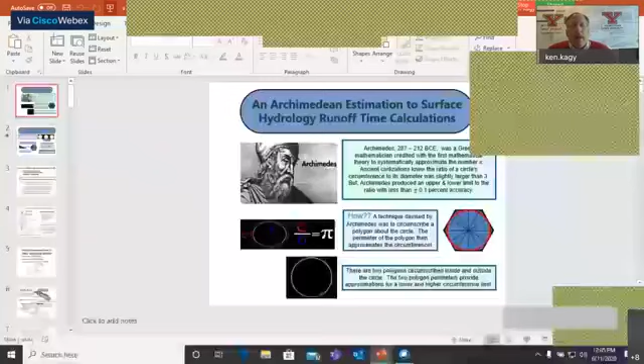All right, so let me pull this presentation up. I've done this presentation for the last 5 or 6 years, and this is the first time I brought in this Archimedes idea, because I was studying him the other day, and I realized that some of the things he did were pretty close to what I was trying to do with this time of concentration. So I just brought it in at the beginning, but this is certainly not how I initially started this research or idea. I just kind of fell into it after reviewing thousands of hydrological reports over the years. It just kind of came to me.

But anyway, just a quick history here, a different approach to what I'm going to be talking about. Archimedes was a mathematician, and he was credited for systematically approximating pi. The way he did that, he developed a technique. Pi was well known back then, like 3,000 years even before Archimedes. They knew there was a ratio between the diameter of a circle and the circumference of a circle, and they knew it was around 3, but they didn't know exactly what that number was.

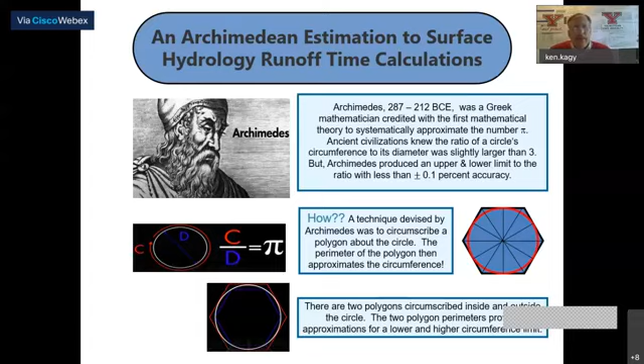So he devised a technique. He circumscribed a polygon about the circle and inside the circle, and then was able to use the Pythagorean theorem to estimate the edges of those triangles. He drew triangles from those polygons, and obviously the more polygons you have, the more accurate that estimate is going to be of the circumference of that circle. So I think he started out with a six-sided polygon, divided into 6 or 12 triangles, and then kept increasing it until he felt he had enough triangles to really estimate the arc of the circle a little bit better.

Back in about 250 BC, he had a 96-sided polygon, and he estimated, based on the outside polygon and the inside part of that polygon, that pi was somewhere between 22/7 and 223/71. That was within 0.1% accuracy, which is amazing considering he didn't have a calculator. In fact, they didn't even use decimal points back then - all they had was fractions.

He did some mathematically ingenious things. He's also known for the Archimedes principle, where the king was concerned that his crown wasn't completely gold. Archimedes was able to submerge the crown in water and estimate the density of the jewels and metal in that crown. It was amazing. He was probably the original master of rational thinking back then.

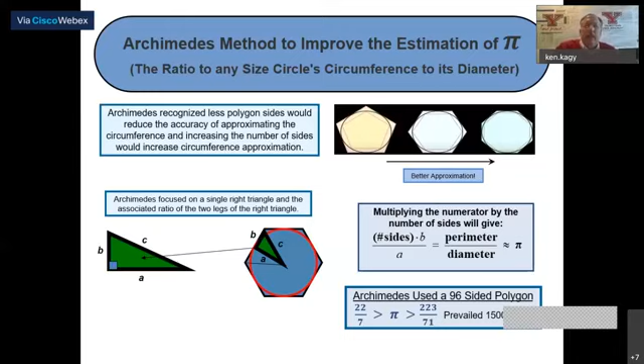But anyway, let's talk about how this would really apply to hydrology. I'm going to start from some of the basics. I know the audience out there really understands these fundamentals, but sometimes I have people who don't understand the basics of hydrology.

Factors affecting stormwater runoff include surface conditions, soil type, watershed size, length of runoff, basin slope, and rainfall depth. Those are all different factors that affect this.

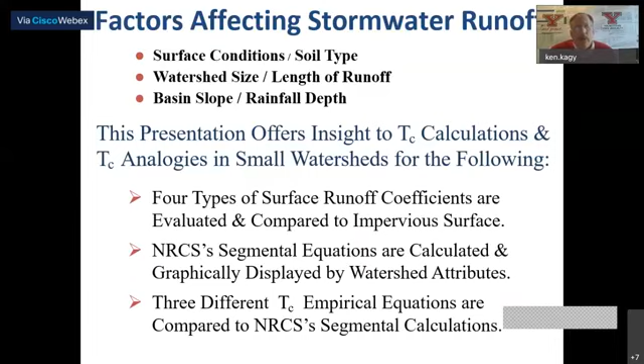In this study we'll look at four different types of surface runoff coefficients that are commonly used, evaluate and compare them, and use NRCS's segmental equations, sometimes called velocity equations, displayed graphically. Then we'll look at three different time of concentration empirical equations and compare all four equations in graphs.

So this is the basic definition of time of concentration. Basically, time of concentration is the time required for the most remote hydraulic distance in the watershed to reach the point of the basin outlet. That's a fundamental part of hydrology theory, and it's important for estimating peak flows because time of concentration is necessary in all the calculations used in hydrology.

I've talked to other professors about this subject, and they say it's probably the least understood parameter of hydrology and where most errors occur. I see that in my thousands of reviews of hydrology reports. There's just lots of errors in this particular area.

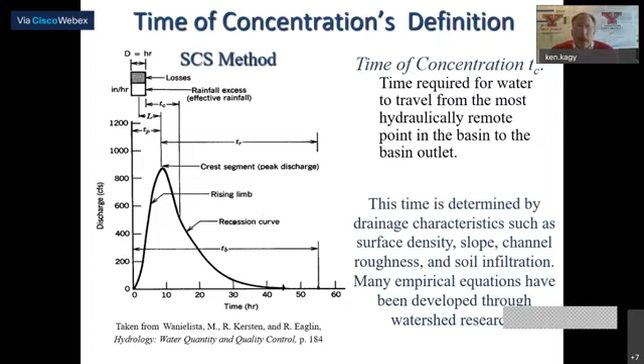So the first one we're going to talk about is velocity equations and NRCS segmental equations. You've got sheet flow, shallow flow, and open channel flow on a watershed basin.

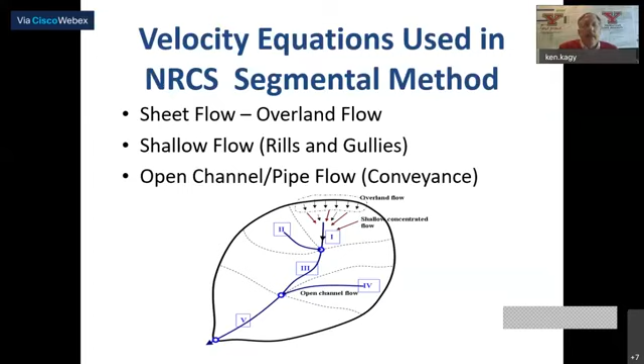The first one is sheet flow, which is estimated by the Manning's kinematic wave equation. Here's the equation itself. Most of you are familiar with it, and it's a very common equation used for stormwater runoff in a lot of areas.

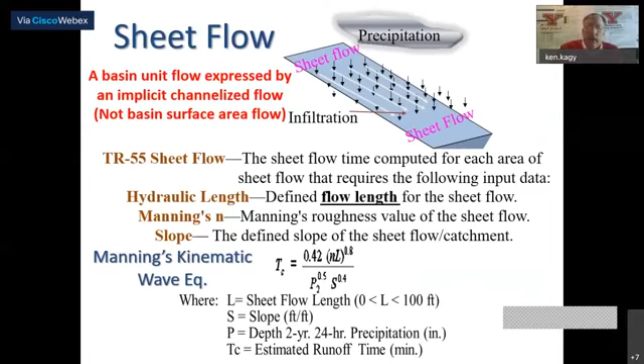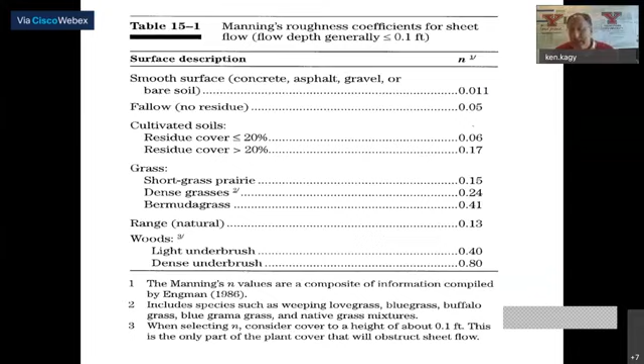And I've seen in practice that people don't differentiate between those coefficients sometimes. They're using channel coefficients in sheet flow and in channel flow, and it does create a bit of a problem.

Over the years, in 1982, Kibler and Aaron indicated the maximum flow length is less than 100 feet for sheet flow.

Dr. McCuen, who I've spoken to on this particular project, came up with equation 15-8, which is in the National Engineering Handbook. It gives you a rough estimate for the length of flow that you would use for sheet flow. Not many people practicing or doing hydrology reports subscribe to this.

It does have its issues, especially on pervious surfaces. It's not real accurate on pervious surfaces, but it does a pretty good job there. On impervious surfaces, it's a little bit more accurate.

So what I did was take the Manning's low value for sheet flow and the high value, came up with an average, and knew what that related to percentage-wise for an impervious surface and a very pervious surface. So I took the extremes and plotted that out graphically just to get an idea.

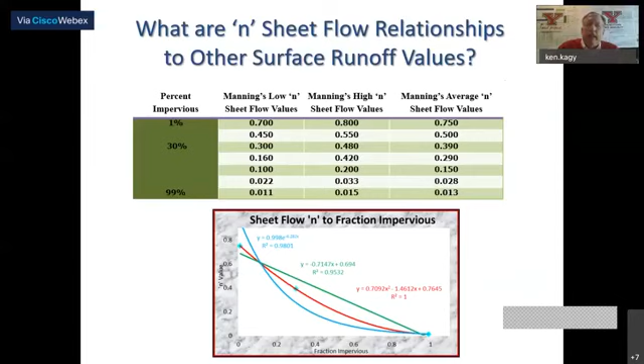What I'm trying to do is get a reasonable distribution in your n values. They may or may not be evenly distributed, but I wanted to get an idea of where these n values fall between the extremes, between a 1% impervious surface and a 99% impervious surface. So I used exponential, linear, and polynomial equations, and averaged those out.

And so I just re-plotted that out and got a fairly reasonable distribution. Next, we'll go into shallow flow.

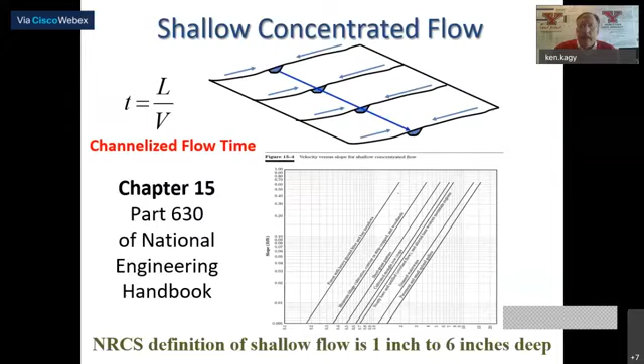Concentrated flow - the engineering handbook has a chart in there for different types of surface runoff. NRCS considers shallow flow to be from 1 inch to 6 inches deep. That's what they consider shallow flow. And so they have created some of these velocity equations based on that depth. This is from the engineering handbook.

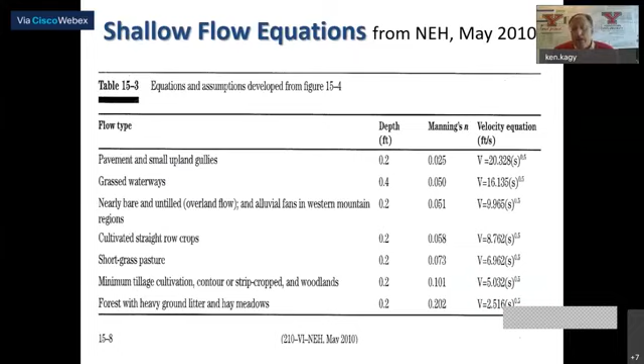And so I just took - you can recalculate these velocity equations. It's just taking Manning's n value and the depth and coming up with a equation from Manning's equation. And so I established a whole set of velocity equations based on my distribution of n values that I just recently calculated, and a flow depth of a quarter of a foot, a little bit deeper, but not much.

Open channel flow, this is Manning's equation, and that's usually what's done. But what I've found in practice is that most people don't really know their channels that well in the basin. So they're just taking an average shape and size of the channel flow and guessing that that's what their channel is going to be. But obviously the channel is going to change as it runs through the basin. It's going to change in size, in width, and its characteristics as it goes through.

But we're looking at some smaller watersheds here, and in these smaller watersheds you can do the same thing you do for shallow flow, as long as the flow depth is small and wide in the channel. So we were going to take that assumption. Then you can do the same thing - you can create velocity equations.

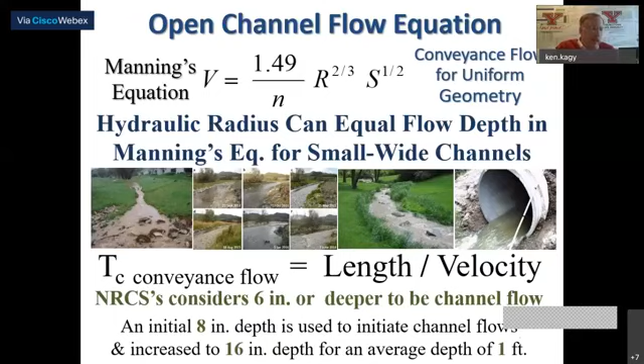NRCS considers anything over 6 inches or deeper to be channel flow. I did an initial 8 inches and increased it up to the maximum of my watershed size, up to 16 inches of depth, so I had an average about 1 foot depth. And if it's an 18-inch pipe inside a watershed basin, that's a pretty reasonable assumption.

These are Manning's n values for channel coefficients here. Most of you are familiar with them. And so then I went through and calculated out these velocity equations based on Manning's n value and initial flow of 0.67 foot, and then of course 1.35 feet of depth.

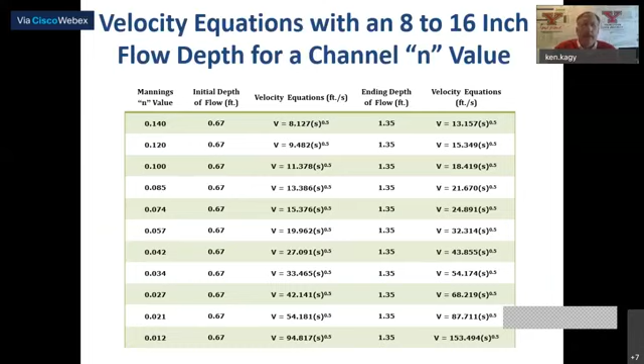So in calculating hydraulic time calculations in the velocity method, you take all 3 of these - sheet flow, shallow flow, and channel flow - and you add them all together. You sum them all up, and that's what you use for your time of concentration. And I can tell you 95% of the reports I see use this method right here for calculating their time of concentration.

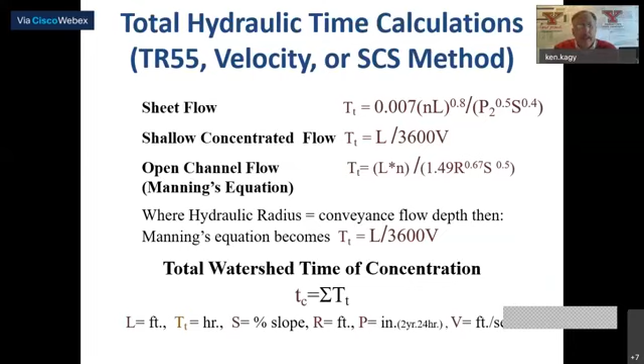And it has its issues. Certainly the big issue it really has is the sheet flow. And there's been a lot of debate on sheet flow. We can discuss that later on, but that's one of the biggest issues you have.

So I'm taking McCuen's equation here, and I'm limiting my sheet flow basically 90 to 110 feet for my more impervious surface, and then I'm dropping it down 10%, just as my increments of the surface conditions also drop down by at least 10%. Remember, I distributed out even 10% - the 1, the 10, the 20% impervious.

And same with the shallow flow, so I did 400 to 500 feet, which is what the National Engineering Handbook recommends for length - about 3 to 4 times the sheet flow. And in actuality, if you want to get an accurate measurement, you should actually go out and visit your drainage basin and take some of these measurements. But I assure you, nobody really does when they do these calculations.

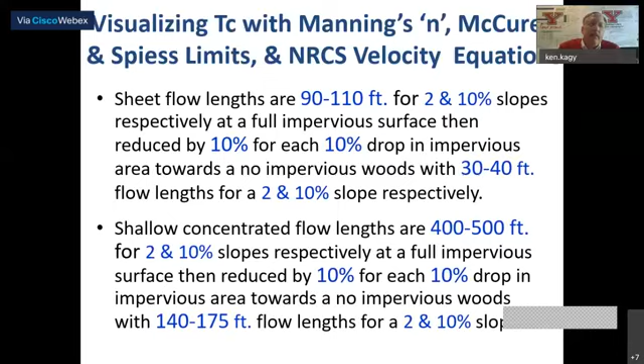So now we're going to try to visualize this. The remaining flow path was considered channel flow, the deeper flow, and the equations consider flow, the path geometry, slope, and surface conditions, all considered homogeneous.

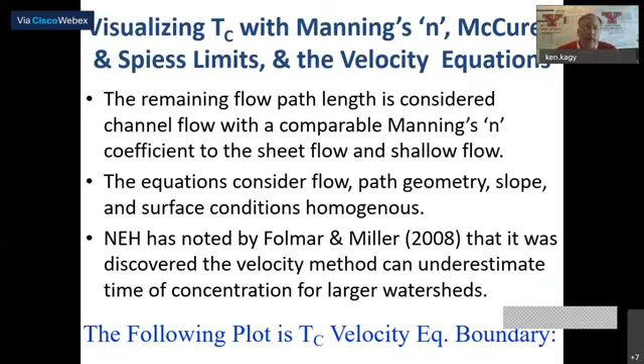So what this looks like when we plot this out, if you take the extremes here, we have a 1% slope at 1% impervious, which is a very pervious surface. And at the bottom side, I took a 12% slope at 99% impervious. So now we have some boundary conditions here with time of concentration, because we know that probably the majority of our time of concentration is going to occur between these 2 boundary conditions. There's going to be unique situations out there where this may not happen, but 95% of your hydrology studies are going to happen within these boundaries.

So what we want to know, or what we want to find out, is what's in between here. What's in between those 2 lines, and how do we fill in? How do we find out the information between those 2 lines?

So these are some of the basic assumptions I used. High impervious surface basins are defined by the lower graph, and the pervious surfaces are defined by the upper graph. This is where most of your time of concentration occurs.

Following were interpolations for relationships of percent impervious using the CN value, the C value, and N values. I then calculated those out using the velocity equations based on my distribution of those values.

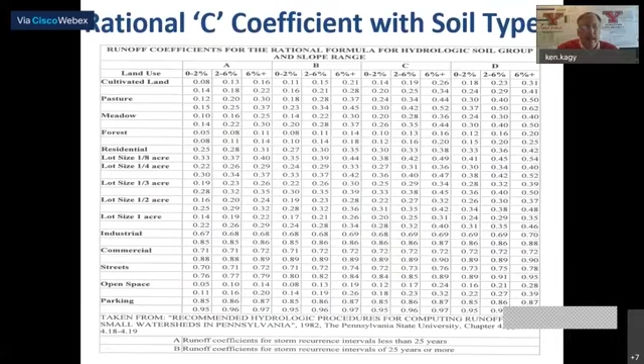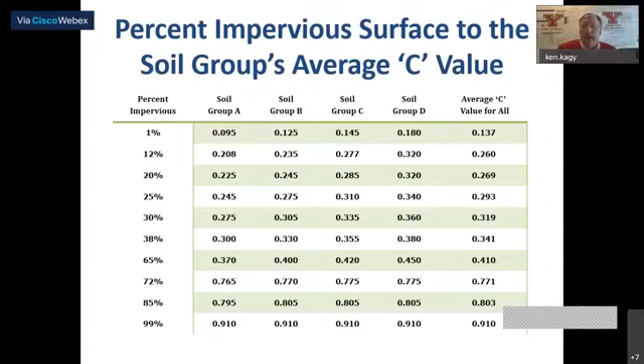They incorporate slopes into C values, and these are the common percent impervious surfaces based on the same description you saw in the CN values. So we can relate those C values based on this table. This one happens to be from Pennsylvania State University, generated for that area. I then related the percent imperviousness with those soil groups for C values and took an average for all of them.

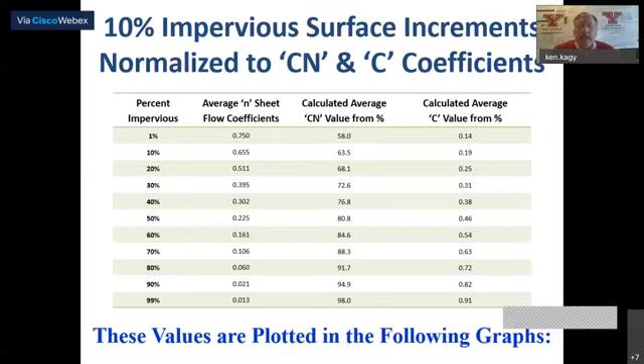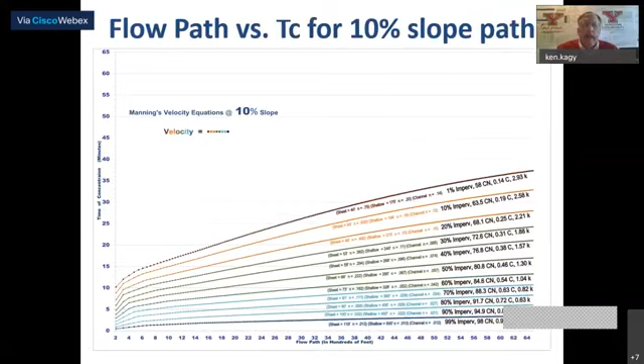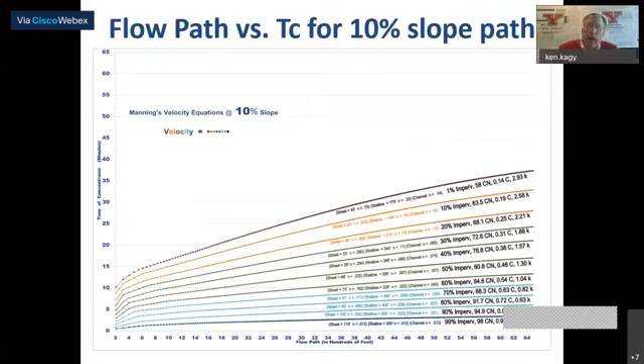Here's what 10% looks like, and now you can see they really start to compress. But we have something to compare to, with N values, CN values, and C values — they're all related now, and tied back to impervious surface.

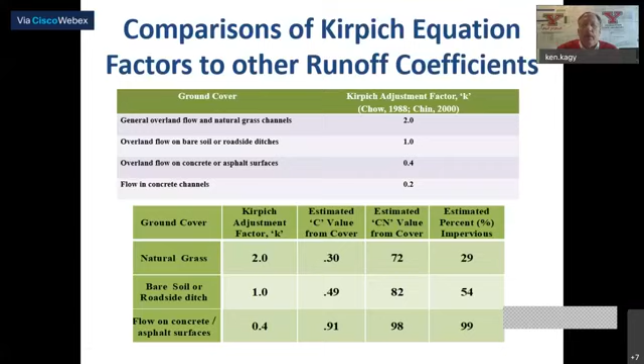I plotted those out and I'm calling it the K value. What we don't have is a K value for the Kirpich equation on the wooded end, so we'll have to extrapolate a little, which is sometimes dangerous, but we didn't have to extrapolate too far, so hopefully it's not too big a risk. Now I compare — I calculated this out just like I did with the N values.

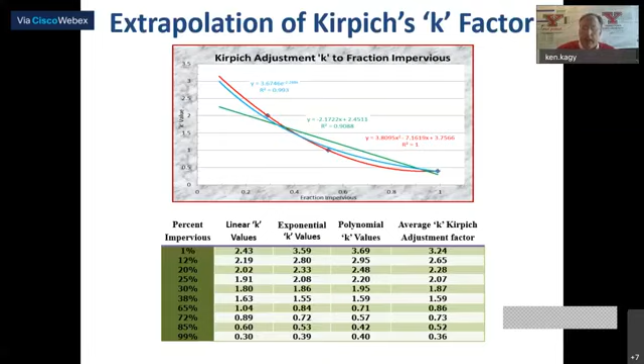As you can see, I did the linear, exponential, and polynomial equations, and I came up with an average for each type of percent, using just the initial 3 plots. Then when I redid that average, recalculated it and replotted it, I came up with an estimate for 1%, which is about a K factor of about 3.

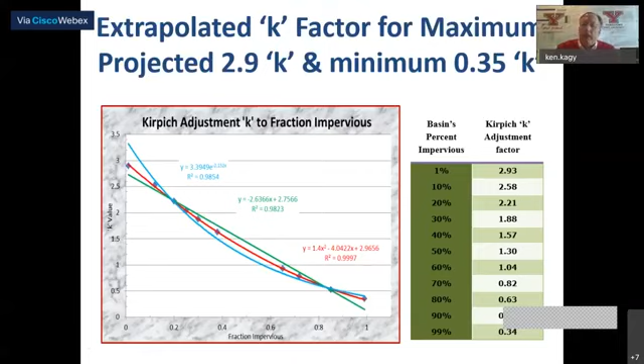That's the area that we don't really have any research on, so we just kind of projected it out there from extrapolation. Now I've got a table that can relate impervious surface to CN values, to C values, to Kirpich K value, and the N sheet flow coefficients. Here's this table.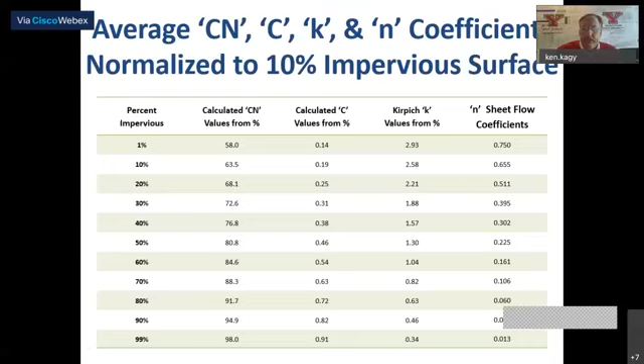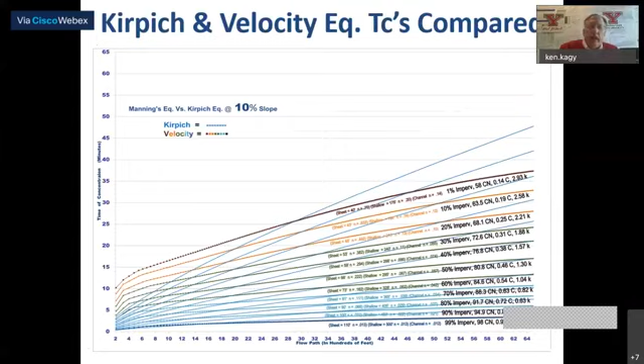Here's what 5% looks like, and here's what 10% looks like. They all start to compress, which makes sense. But you can see Kirpich is much lower down at the bottom end, or the shorter end of the flow path. That's really because of the sheet flow calculation that's in the velocity equations.

NRCS lag equations are a very popular equation. I've seen that if they're not using the velocity equations, most are using NRCS lag equations. It was developed by Mockus in 1961, for areas less than 2,000 acres. That's a little bigger basin than what I was looking at, but it still fit the description. It's very popular, it has a CN value in there, and it's basically an equation formed on basin surface data or surface conditions.

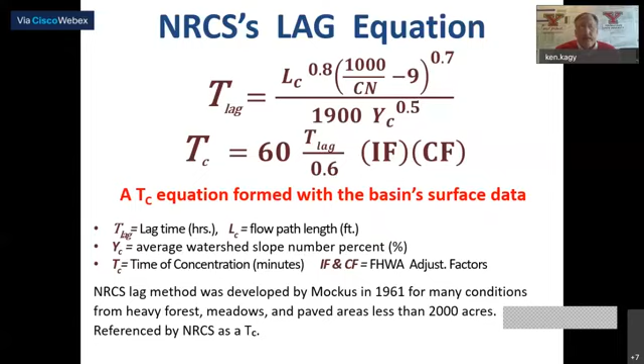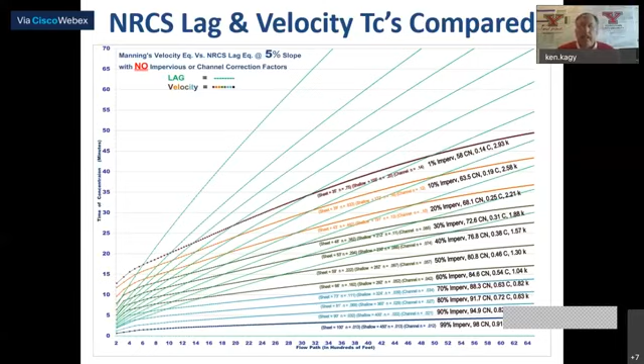When you plot these out and compare them to the velocity equations, you can see they're very high in time of concentration. That's what I see a lot of people using in hydrology reports, ending up with very high time of concentration. It almost misses here - this is for 5%, it almost misses all of the velocity equations, starting about halfway down on the velocity equations.

But Federal Highway Administration, in HEC 19, developed this adjustment factor IF, and applied it because they felt that, since they're not always working with farmland, which is where NRCS/Mockus developed his time of concentration equation on agricultural type land, they added some impervious factor, this IF value, and a main channel or man-made channel factor. If you take these factors, I already had a relationship for CN values to impervious factor from the table I just created.

The main channel factor is a little bit of a speculation, but the fact is, above a CN of 80 or better, or especially 85, there's going to be a lot of man-made channels in that type of development or surface condition, because there's a lot of impervious surface.

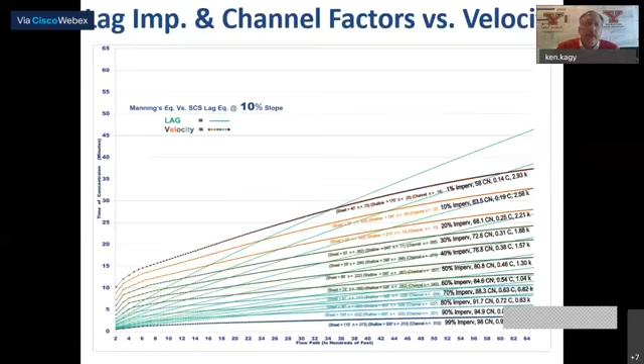Another equation I took a look at was the FAA equation. This equation is sometimes, or quite often, used in urban conditions. It was based on surface data or surface condition. There was no channelization consideration in this equation, but it was done on airports, developed by the Army Corps for FAA.

I really like this equation because when we plot it out compared to the velocity equations, it has almost identical shape to the curve of the velocity equations, but there's no channelization factor. If anybody has a channelization factor for this equation, I'd be interested in talking to you, because it almost fits these velocity equations. I've found that without that 1.8 factor in there, it drops down real close to these velocity equations. In fact, Texas had a modified FAA time of concentration equation.

I think they use 0.7 something as a factor rather than the 1.8, and it almost puts these a lot closer to being in line. But I wanted to just show this as a comparison, because this is what happens when you don't have channelization in your time of concentration calculations.

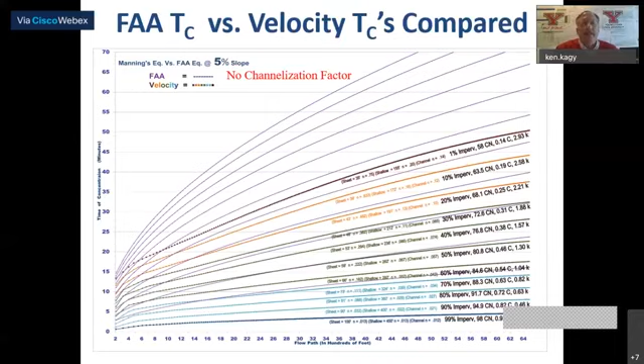So looking at this small watershed runoff response, the time of concentration comparison graphs between the velocity equation and channelized empirical equations convey a systematic intersect for each related surface coefficient. Empirical equations provide a lower time of concentration in short flow, and the empirical time calculations provide a higher

time of concentration on your longer basin flow paths. Runoff time on small basins exhibits a transformation from surface attribute flow dominance to a channel attribute flow dominance. So I just refer to this as timing outside the channel and timing inside the channel. And you can see that in that pattern just by the way they cross.

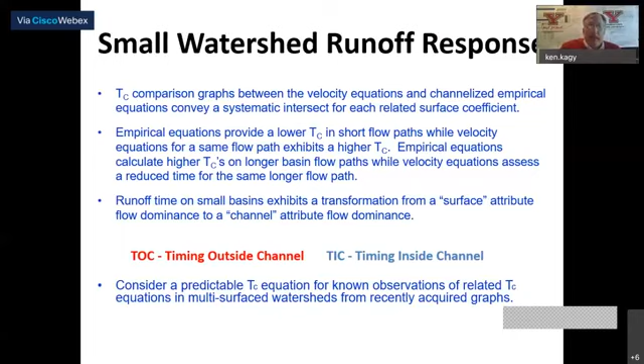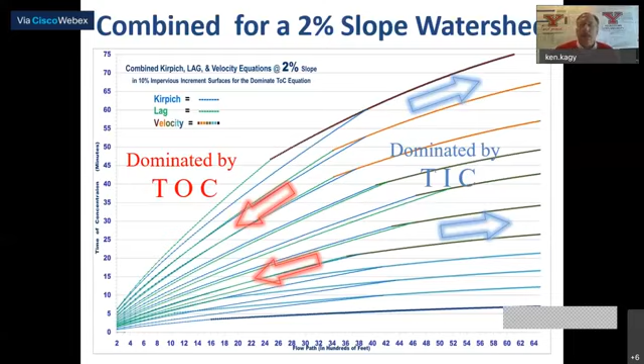This is for a 2% slope. This is for a 10% slope. So it's very consistent where they cut those velocity equations off at.

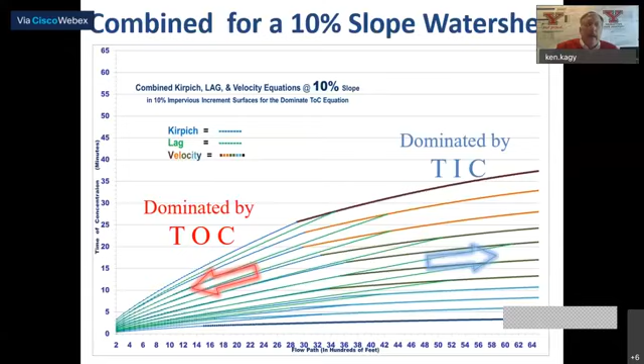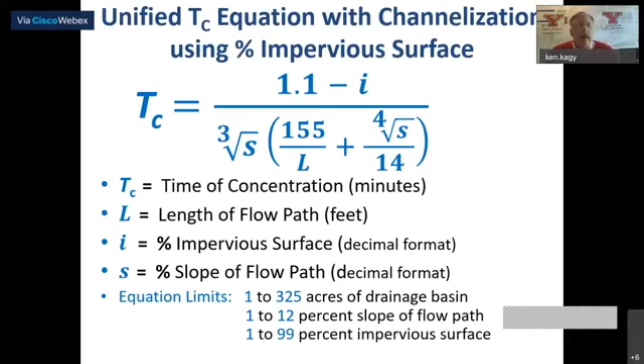So if you take that, I came up with this equation that fits those types of curves or those types of equations. And this one's set up for impervious surface. And it's basically just has the length of flow path in it, percent impervious surface, and the slope in there.

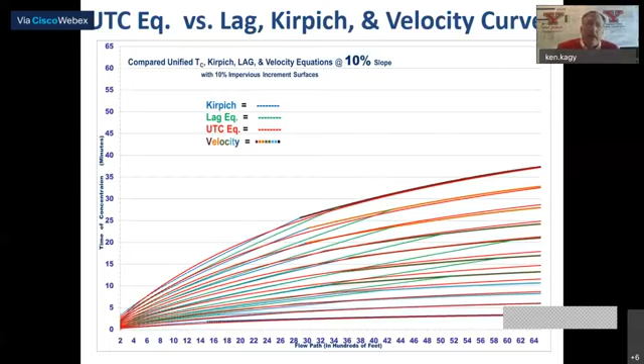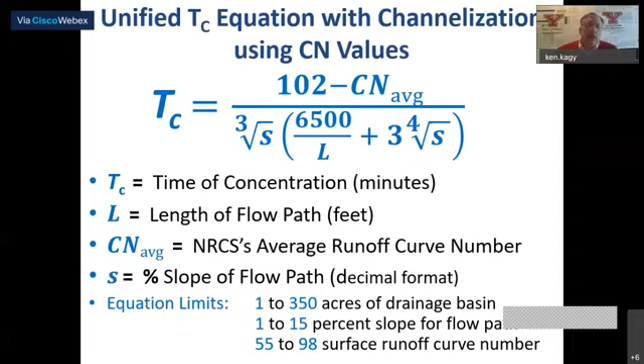And of course here, depending on what soil type you have, you would plug in the values into your X and your either a 0, 1, or 2, and then you would convert everything over to a CN average at that point.

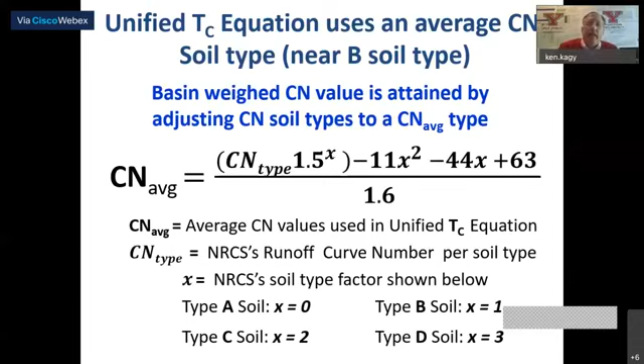This is the one for C value. And you can see it's the same format, same type of equation. Again, the C value is not as well defined, and so I had a little bit more difficulty trying to come up with a pattern.

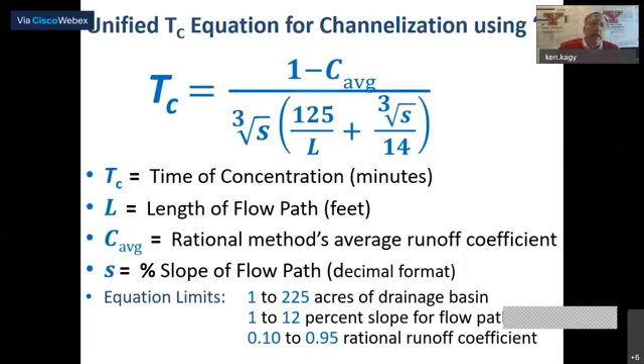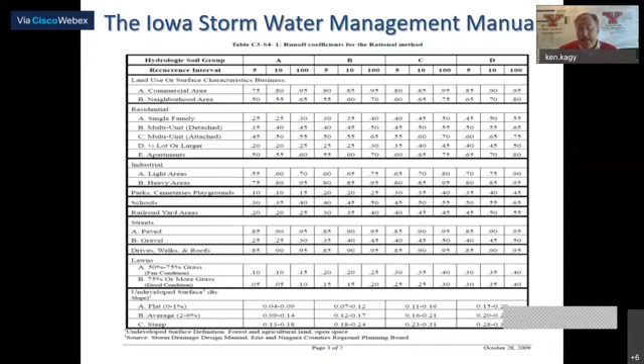And so there's a lot of these charts across the country, but everybody's just slightly different. So here's one for, this one's for Iowa. And again, it's slightly different. It's got a 5, 10, and 100-year storm events.

So to me, the C value is a little more complex. It's got flow depth in it. It's got your percent impervious in it. And so there's a much wider range for the C value.

Rossmiller came up with an equation for calculating a C value based on a CN value, and there's that complication. I've also seen simple definitions where the C coefficient is just runoff over the rainfall event or rainfall depth. That's how they calculate the C value. So I haven't found a real standard for that C value yet.

But anyway, I compared it. I used 10-year storm events for those areas and plugged that into the equation to see how it looked and compared. This one's for Pennsylvania at a 5% slope, taking into consideration more flow depth because I'm not using just my typical 3-inch flow depth, I'm going up to whatever that area is. I think Pennsylvania was like 4.5 inches for a 10-year storm, so I used a 10-year storm here to compare it.

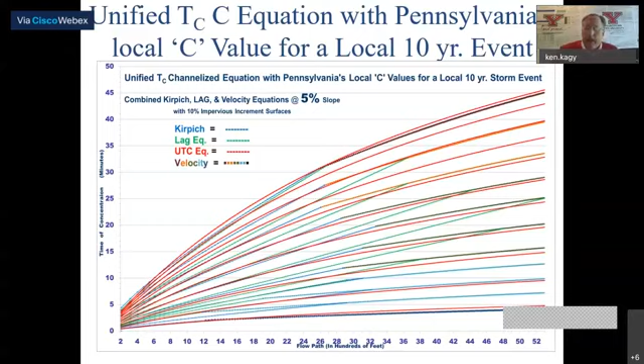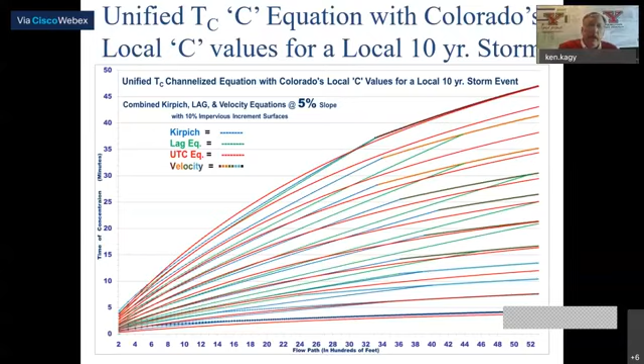This one's for Iowa at 5%, and it does fairly well with that equation. This one's for Colorado, and it does a pretty good job too at 5%. I didn't show the 2 and 10%, but it shifts the same way with those slopes and matches up pretty well with the other equations.

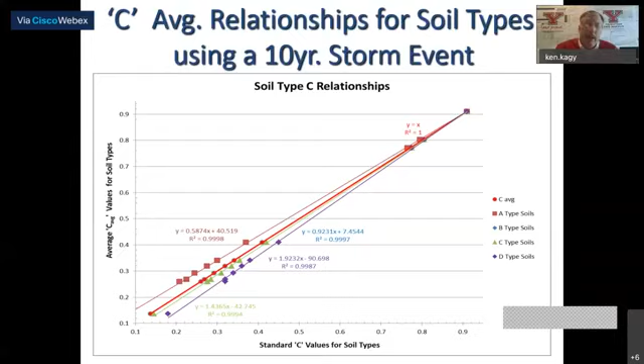Of course, we've got the soil types related now to the C equation, so you can adjust the C value based on your soils, but the adjustment is much smaller here. You probably don't need to make an adjustment unless you're going to be less than 0.5. You can see they converge as you get above 0.5 on the soil type. And again, if you're a B-type soil, which a lot of places are, C average works very well, I wouldn't do any adjustments for it. In fact, it lines up almost right on top of it. This is the equation you would use to adjust the C values.

All right, so this is my add-on here. What is the relationship with Archimedes and watershed surface runoff? Well, for years we've known there is a relationship, and we've seen time area diagrams. There's almost a standard ratio in these time area diagrams. You can see here on this graph that it almost follows a ratio.

But the problem is it depends on the physical system itself, so each drainage basin is going to be a little bit different and would have its own ratio. But once you know it for a particular drainage basin, you can almost say there's a linear relationship there. The other thing that has been known for a while is watershed time to equilibrium, Te, where the entire watershed contributes to the runoff. This is pretty much where it starts to get into the channels at that point.

And you compare that to the time of concentration. If the ratio of time of equilibrium to time of concentration is very small compared to 1, it's probably a surface dominated flow. If the time of equilibrium is a little closer to 1, then it's more of a channel dominated flow. And we just showed that.

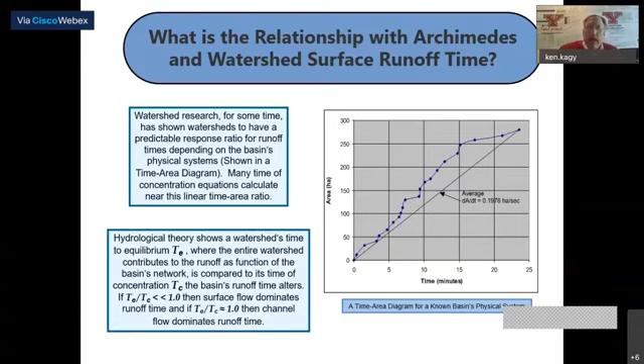So what would Archimedes do to exploit this basic information, these truths of what we call hydrology? First, he would circumscribe the upper and lower boundaries, which I showed you in that one graph. He would say, well, we know time of concentration has to fit somewhere within these two boundaries. That's the same thing he did with pi, putting the circle between two sets of polygons.

And the other thing is he would establish a relationship, one that's been established by Mockus, who did the time of concentration, between the length of flow path and area. This is in the engineering handbook, the NRCS engineering handbook.

And then the last thing he would probably look at is the fact that the time of equilibrium over time of concentration ratio changes from a dominant surface condition to a dominant channel condition. He would establish that the confluence between time equations with the dominant flow types would show up where the intersection occurred, and we showed that in several of those graphs between Kirpich, lag, and velocity.

Not that he inspired me to do this, but that was kind of a quick comparison to a guy well known in history for his mathematical skills. I always admired him for his thinking—he was the master of inductive and deductive logic, no question about it.

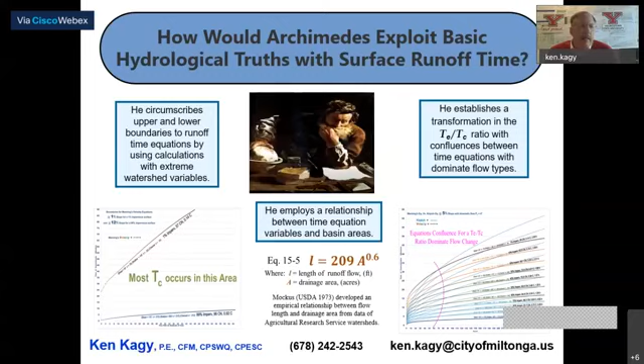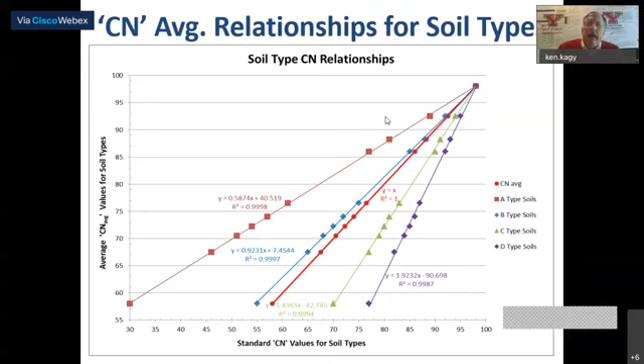Other than that equation that Dr. McCuen developed - I think it was length divided by, where is that - I based it on that. I based it on his principle. His equation works well for pervious areas, but when you get into impervious areas, it kind of blows up on you, that equation.

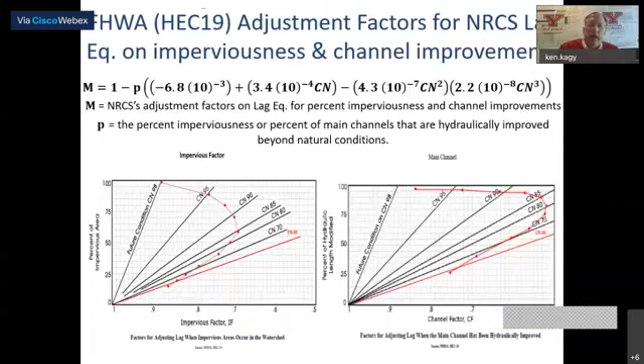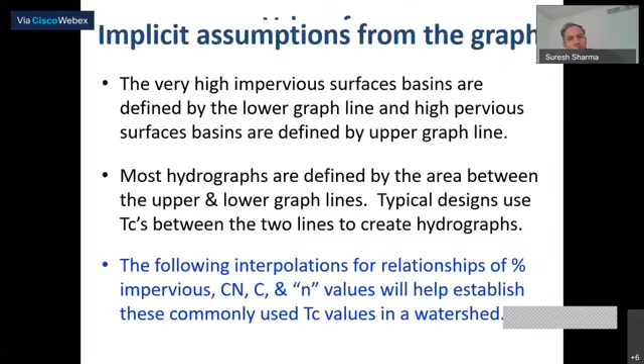So basically you took that paper to come up with that conclusion? Right, I took the basic philosophy that he says we need to reduce. Did he specifically say 10%? No, he did not. So I am making the assumption that...

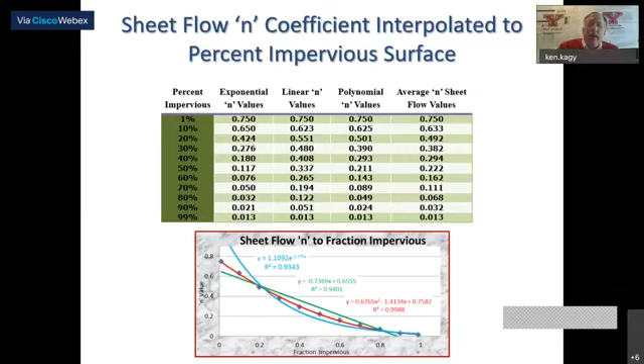There it is: L equals 100 times the square root of S divided by N. So that's what he's saying the length should be. But if you use or try this equation, then on very impervious surfaces this L blows up to like 1,000 or 2,000 feet, and so it wasn't really practical.

We can assume that your assumption was more or less correct because when you plot the graph, all these equations fit together, they overlay with each other. So that means your assumption is not bad. Anyway, if your assumption was too far off, then they probably wouldn't.

Yeah, and all of them say it should be less than 100 feet for sheet flow, because it messes up your calculations if it's more than 100 feet, and I find that to be true. So that's why I took the 100 feet and started from there, because when you calculate down to the very pervious surfaces and use his equation there, that 10% reduction almost fits - it comes in line with the impervious surface at that point, because you end up with 30 feet and 20 feet down at the lower end.

This was interesting to me because at some point, for students doing a senior design project in our undergrad classes, I used to ask them to use a different time of concentration and then compare, because there are so many equations and we'd like to see which one actually represents the real scenario. That's why I asked them to use different equations, and it always relies on the user's decision eventually. We have to make our own decision based on the data available and the equations developed earlier.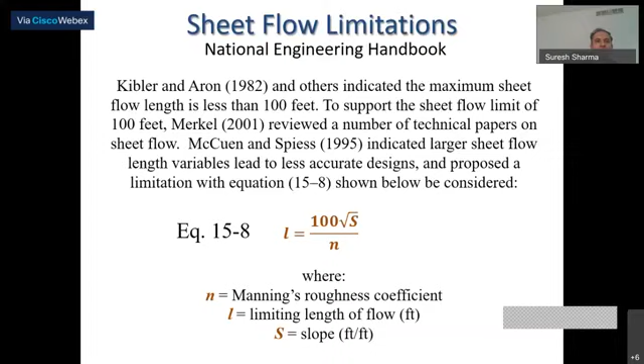Yes, the answer is yes, since we already discussed it. Kane kindly gave us a paper as well as his presentation, so I'm going to forward you these things. Do you have any more questions? I think he doesn't. All right, Kane, thank you so much for organizing this event. Thank you for the invitation. I'll continue to have interaction with you in the future.